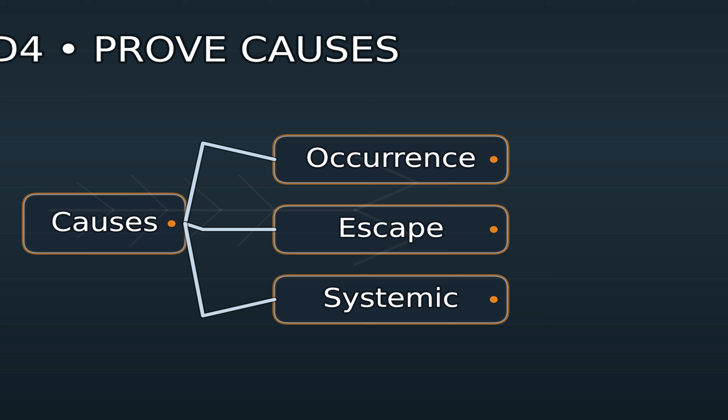D3 establishes customer protection, quarantine suspect parts, verify containment, and set up a firewall. D4 digs into root cause and escape with tools like 5Why, Ishikawa, and cause tests.

D5 selects permanent corrective actions, Poka-Yoke-First, covering all root causes. D6 implements and validates those actions with both quick checks and long-term capability studies.

D7 prevents recurrence by updating standards, rolling changes to similar products, and building the lessons into layered process audits. Finally, D8 closes with evidence, approval, and celebration.

In automotive, this sprint generally follows the 1-5-20 rule: contain within a day, find and agree the root cause within 5 days, and prove the fix within 20 days.

Picture this. You're deep in your day when the phone buzzes. Customer says, "Our line is down, your bracket won't fit."

Your heart sinks. 3 months ago, you chased a similar hole-size issue. You thought it was resolved.

The clock is ticking. Every minute of downtime costs thousands. If you do nothing, you could lose the customer and lots of money.

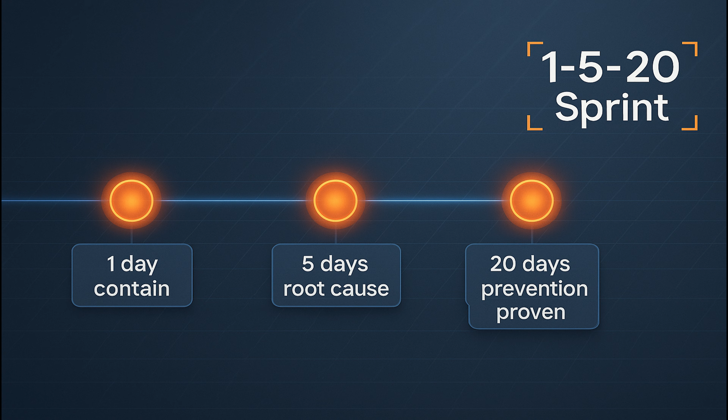In this moment, you need more than a guess. You need a structured response that protects them immediately and prevents it ever happening again.

The fire you feel right now is the fuel for learning. We'll channel it into a methodical sprint.

The goal of D0 is simple: protect the customer and put out the fire. Immediately decide whether to stop shipments or launch 100% sorting or rework.

Open a visible log with times, quantities, and owners. Within hours, declare your clean point, a lot number or timestamp after which every part shipped is verified good.

Important thing is that, don't guess. Include evidence such as inspection records, lot IDs, and photos.

Communicate your containment plan and clean point to the customer through their portal. Use data to reassure them.

Share how many suspect parts were quarantined, how you verified the firewall with run charts, and what's being done upstream. A clear, data-backed clean point calms the customer and buys you time to do real analysis.

D1 is about people and communication. Assemble a cross-functional team: process, quality, maintenance, tooling, logistics, and sometimes supplier quality.

The key point is creating a team with multidisciplinary people. Make sure each member has the skills to analyze the root cause, define and implement corrective actions, and monitor their effectiveness.

Appoint a team leader experienced with the 8D process, and a sponsor or champion who can remove roadblocks. Establish a daily cadence for internal stand-ups, and set a single voice to the customer portal, no mixed messages.

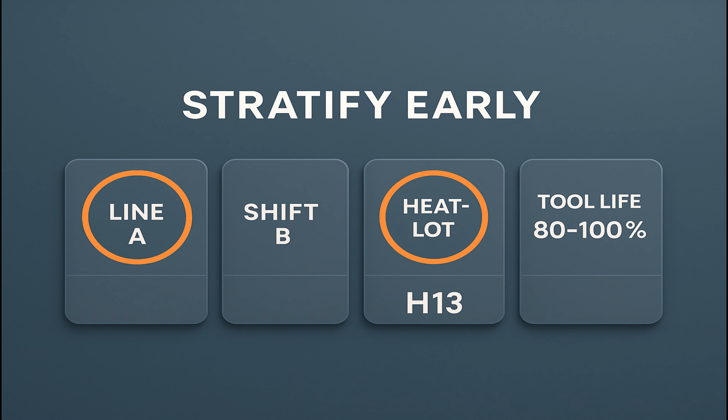Then build an is and is not grid: where and when the defect is found, and, equally important, where it is not. This eliminates random guesswork and highlights the most likely root causes.

Use the 5W1H method to gather all relevant facts: what object has the problem, when it was observed, where it occurs, who or which qualifications are involved, whether there's a trend, and how the deviation manifests.

Collect data and facts: production date, shift, batch, measurement results, and reject rates. Next, verify that the data you're using is reliable.

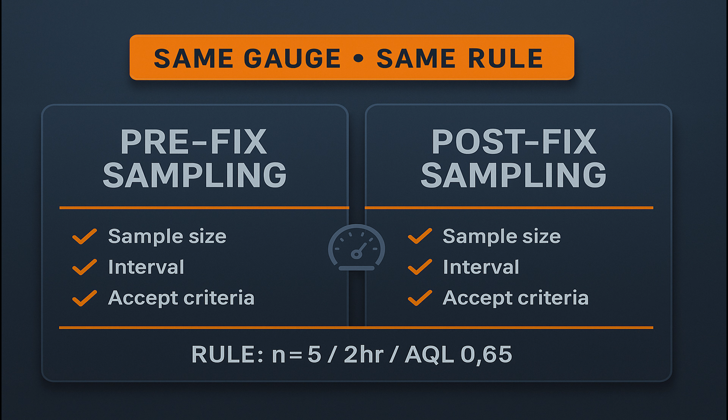Perform a quick measurement system analysis or gauge R&R check. If your measurement variation is over 30%, the system is unacceptable. Between 10 and 30% is conditional, and below 10% is preferred. This quick step prevents you from building an 8D on noisy data.

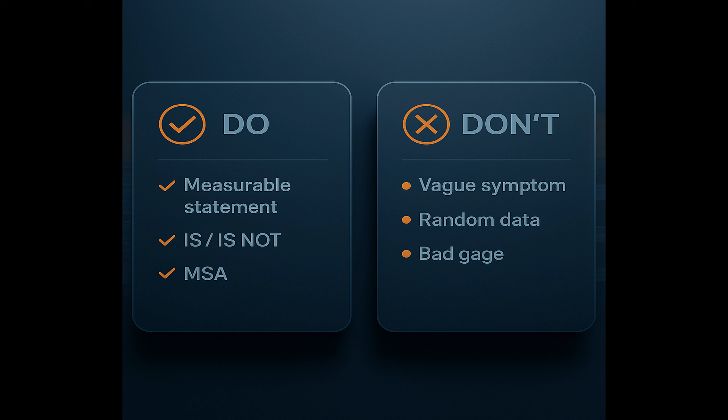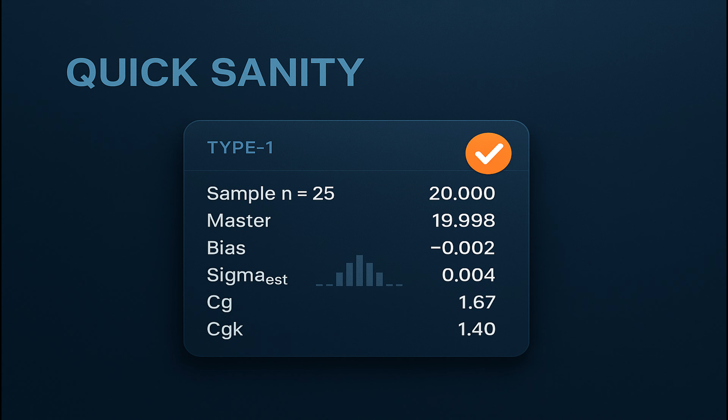Finally, set your targets clearly. Without a defined specification and acceptable performance criteria, teams will debate opinions instead of facts. Tie the problem statement back to a customer requirement or spec limit. That way, success is clearly defined when you select corrective actions.

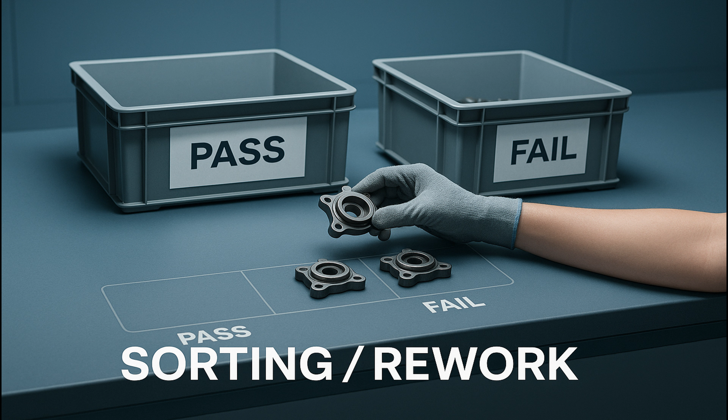D3 builds a firewall while root cause work proceeds. Containment actions protect the customer by isolating the problem from the entire supply chain and avoiding delivery or assembly of suspect parts. Actions can include 100% inspection, sorting checks, or rework.

Define responsibility and start dates for each containment action. Monitor status and assess risks, because containment itself can introduce side effects.

Verify effectiveness with data. Use run charts or additional gauge checks to monitor defect rates and confirm that no further bad parts reach the customer.

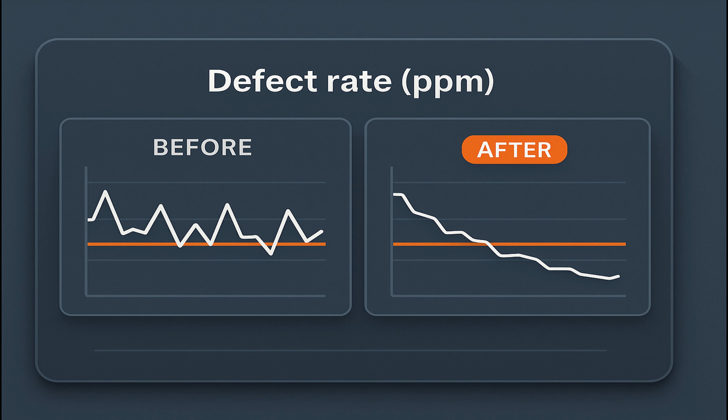Clearly mark dirty and clean areas so employees don't mix suspect and verified material. Remember, the firewall stays up until you've validated the permanent corrective action in D6.

D4 is the heart of the 8D. Root cause analysis must consider 3 levels: the technical root cause, why the defect occurs; the quality assurance or escape cause, why it isn't detected; and the systemic or development root cause, why the system doesn't prevent it.

Neglect any of these and the problem will return. To ensure completeness, use the 3-legged 5 Why. Perform a separate 5 Why on each leg: occurrence, escape, and systemic.

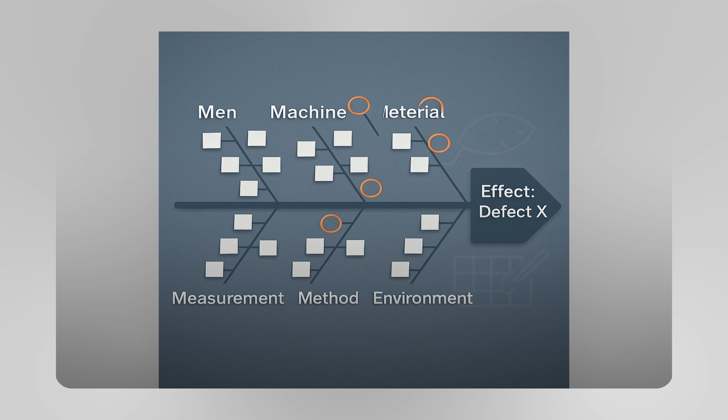Start brainstorming possible causes using Ishikawa or fishbone diagrams when the cause is unknown or complex. Categorize potential causes across men, machine, material, method, measurement, and environment.

Then use 5 why to drill down, remembering that 5 is just a rule of thumb. The root cause might emerge after 3 questions or 7, so do not fixate on 5, dig until you find the cause.

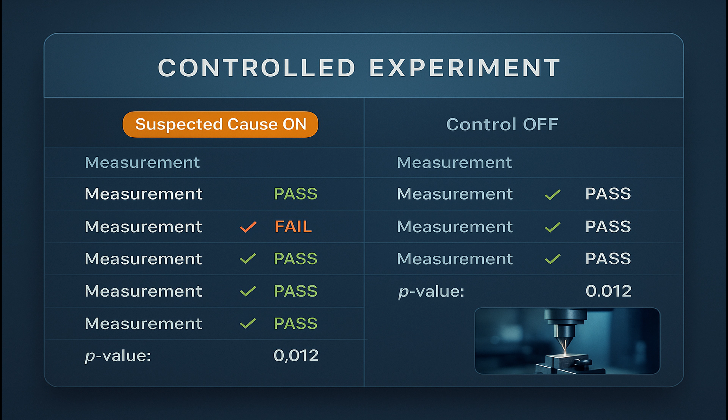Next, apply a cause test for each possible cause you find. Does it fully explain the data, partially explain it, or not explain it at all? Eliminate causes that don't match. For ambiguous ones, do further investigation.

When multiple interacting factors are suspected, use fault tree analysis. Most importantly, verify every proposed root cause. The root cause must be something you can turn on or off at will.

Reproduce the defect by manipulating the suspected cause. Confirm the defect disappears when the cause is removed. Only when both occurrence and escape causes are proven with data do you proceed to D5.

In D5, you choose actions that will permanently remove the causes you've verified. Start by listing potential corrective actions covering all root causes.

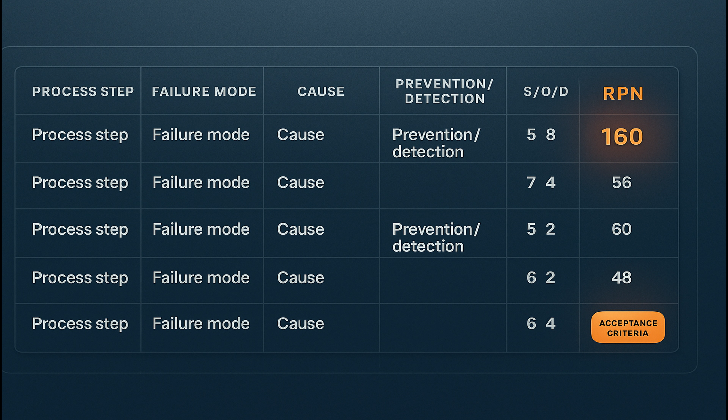Verify and evaluate each one. Perform a risk analysis. Weigh the advantages and disadvantages and be careful of unintended side effects. Establish acceptance criteria and use tools like PFMEA to assess risks.

Prioritize Poka-Yoke, error proofing that makes the defect impossible, over additional inspection. For the occurrence leg, consider sensors, interlocks, or automation to prevent misassembly.

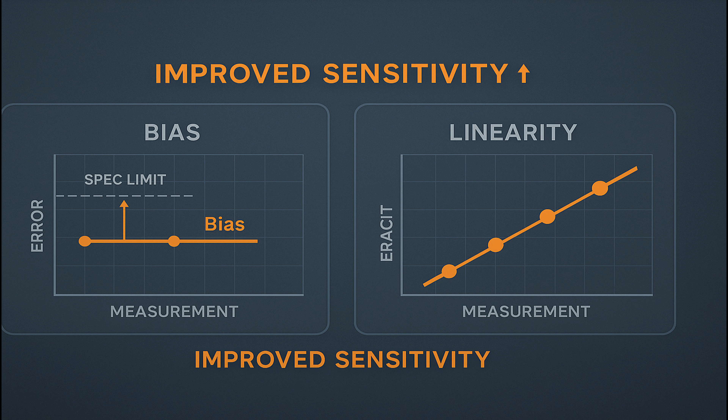For the escape leg, improve detection by upgrading gauge sensitivity or increasing sampling. For the systemic leg, update design guidelines or maintenance plans. Choose the simplest, most cost-effective solution that covers all root causes. Don't forget the human side.

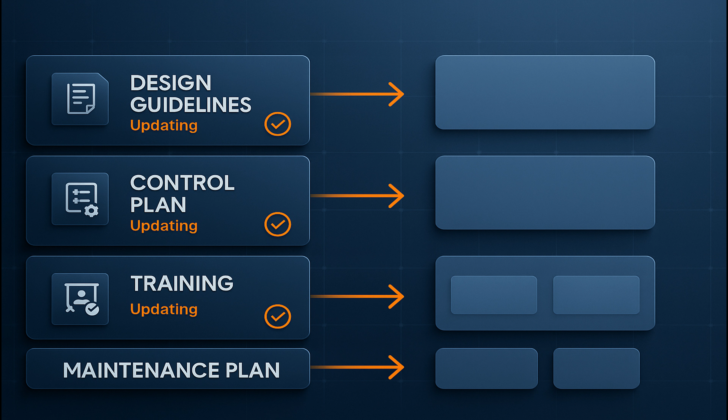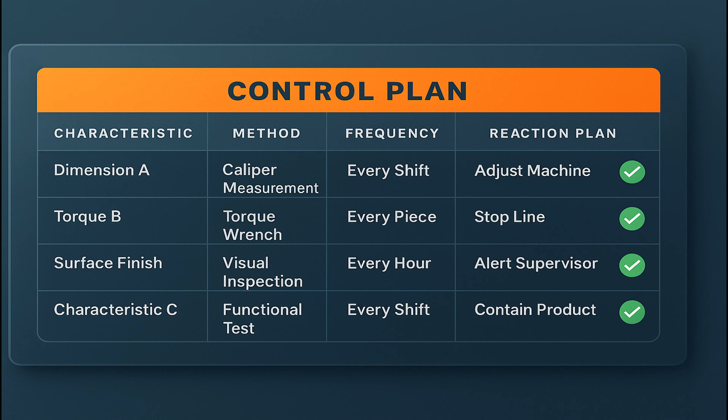Update training materials, work instructions, PFMEA, and control plans, so the new process is documented and auditable. Employees must understand the new standard. Simply posting a notice isn't enough. Refresh training for operators, quality inspectors, and maintenance teams if needed.

And remember the cost of quality. Investing in prevention may have a cost up front, but it reduces warranty expenses and complaint handling later. Corrective actions must address the root cause, the escape cause, and any systemic weaknesses. With the right actions, you'll often see complaint rates drop by 30% or more.

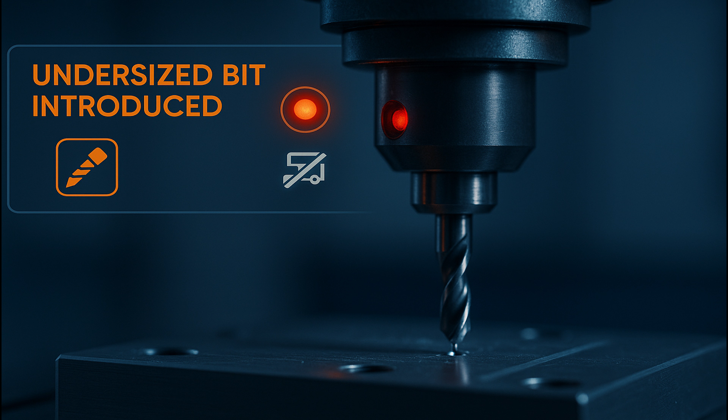D6 answers the question, do the actions work? Begin with a documented implementation plan that assigns responsibilities and dates. After installation, run a quick check, a provocation test, to deliberately challenge the new control and show that it catches or prevents the defect. For example, intentionally introduce an undersized drill bit and confirm the interlock stops production.

This immediate test verifies that the new Poka-Yoke or detection control behaves as intended. Then run a long-term check. Collect data under normal conditions and evaluate process capability. Look at your CP and CPK values, failure rates, and product audits. Only if the process is both stable and capable can you remove containment.

Simulation matters too. Perform rabbit part audits or golden part verifications by running known good and bad parts through the system to ensure it discriminates reliably. Conduct both product audits, dimensional checks, functional tests, and process audits. Confirm procedures are followed, gauges are calibrated, checklists are complete.

If validation exposes gaps, return to D5 and refine your actions. Many repeat failures occur because teams skip rigorous validation. Don't let that happen. D7 ensures the fix spreads and stays.

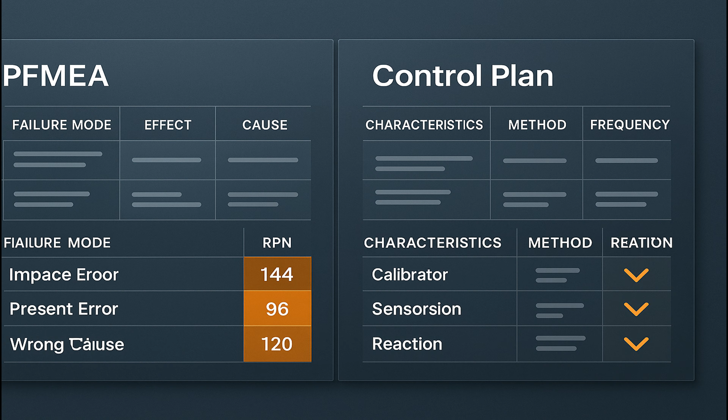Start by updating relevant documents: drawings, FMEA, control plans, maintenance plans, and standard work. Extend the changes to similar products and processes through Yokoten, read across. Ask where else this issue could occur, and implement the same controls proactively.

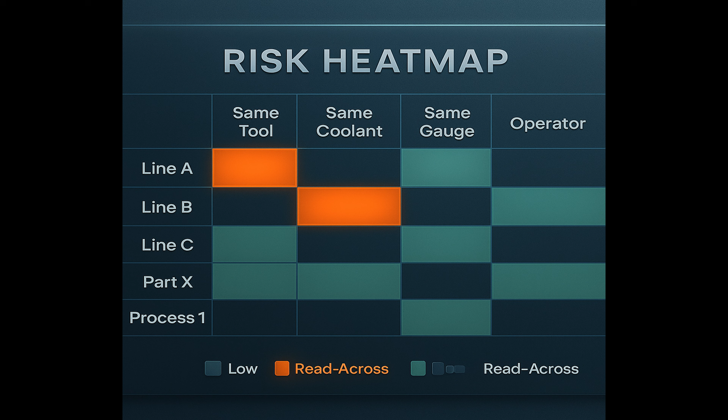Set up or refresh layered process audits, daily line checks, weekly supervisor checks, and monthly management audits to verify that the new controls are present and effective. Add specific questions to your LPA checklist. Is coolant concentration logged? Is tool life counter below limit? Has the pin gauge been verified with a master? What gets checked gets kept.

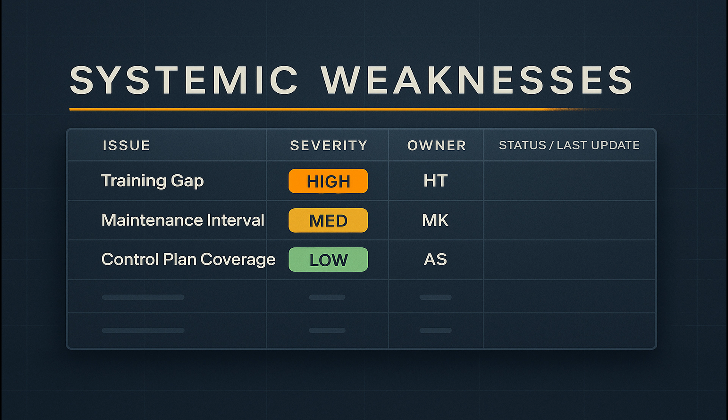Capture lessons learned and share them widely so future products don't repeat the same failure. Document the systemic weaknesses identified, the evidence you used, the fix you implemented, and the performance improvement you achieved. Use a simple template: problem, verified cause, permanent fix, evidence of effectiveness, and where else the fix was applied. Disseminating this knowledge leverages today's defect to make tomorrow's product stronger. Continuous improvement isn't an afterthought, it's how world-class factories evolve.

D8. Closure is more than sending off a report. It involves evidence, acceptance, and recognition. Finalize the 8D report, ensuring all actions have been implemented, validated, and documented. Obtain approvals from both internal management and the customer.

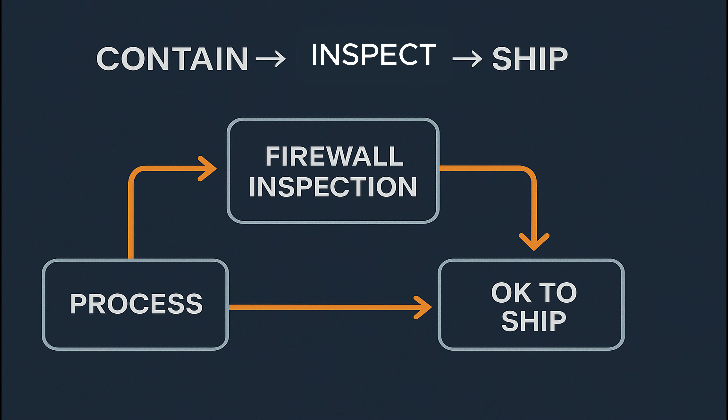Many OEMs require a plant or quality manager to sign off. Archive the supporting data and update the portal status to closed or accepted. Then recognize the team, publicly acknowledge the cross-functional effort, share customer feedback, and celebrate the success. Recognition reinforces the behaviors you want to see again.

Different customers use different portals, but patterns repeat. Ford's portals emphasize a clear evidence trail and feeding lessons learned into future projects. Ford used Covisint and FOSN portals to follow claims. GM's portal requires a rapid cadence of updates and emphasizes data and next steps. GM used Supply Power/PRR portal.

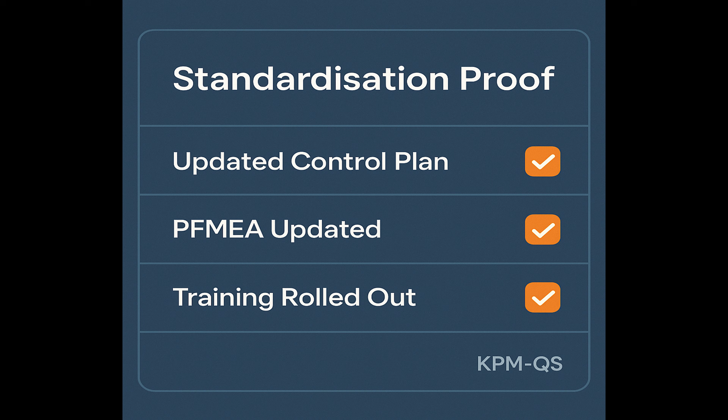Stellantis demands logic chains and proof of standardization and uses the SQP portal. Volkswagen and Audi use KPM-QS, and they look for evidence of standardization. Mercedes wants detailed governance and uses the QEC tool. BMW and Toyota have their own forms. BMW uses the QMT portal and Toyota uses the SQAM portal. Tesla uses the SCAR portal as well.

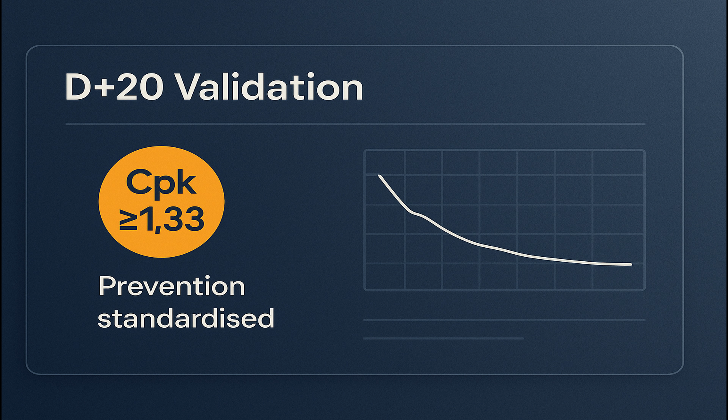Regardless of portal, suppliers should follow the 1-5-20 rule. Within 1 day, define and communicate containment actions. Within 5 days, submit root cause analysis and corrective actions. Within 20 days, prove the fix and communicate actions to prevent recurrence.

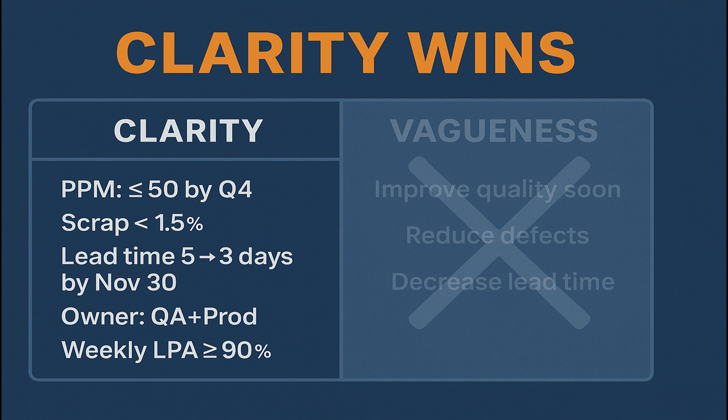All portals want concise notes, time-stamped updates, and attachments like gauge studies, cause tests, corrective action verification data, and capability charts. They reward clarity and penalize vagueness. Understanding each customer's focus lets you tailor your reports and build confidence.

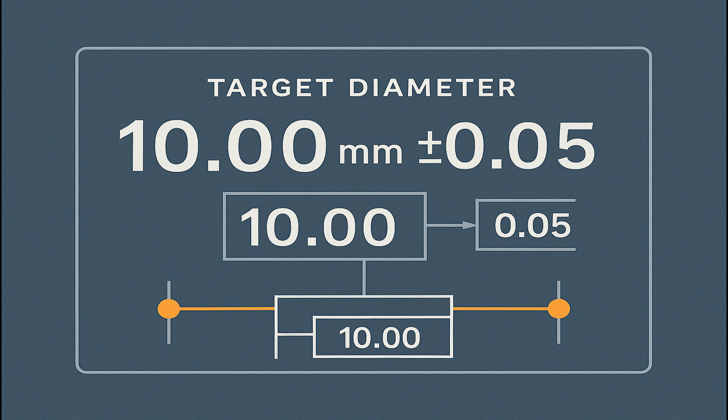Let's ground all of this in a realistic case. Suppose the target hole diameter is 10.00 millimeters plus or minus 0.05. The customer reports 8% of parts arriving between 9.86 and 9.89 millimeters.

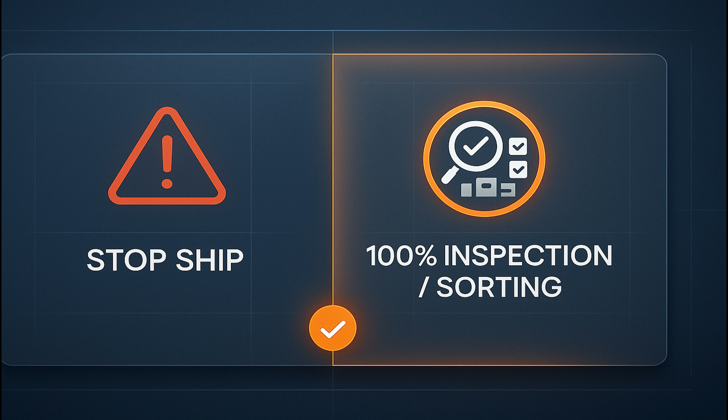Their line stops. You trigger D0: stop shipping, segregate suspect parts, implement 100% inspection, and declare a clean point at 14:25 on September 5th, lot B271. You record quantities, inspection methods, and attach the log.

In D1, you assemble your cross-functional team with process, quality, maintenance, tooling, logistics, and a sponsor. You set a daily update time with the customer.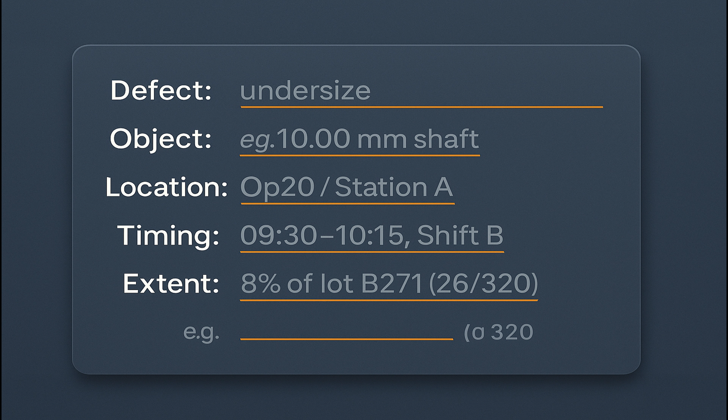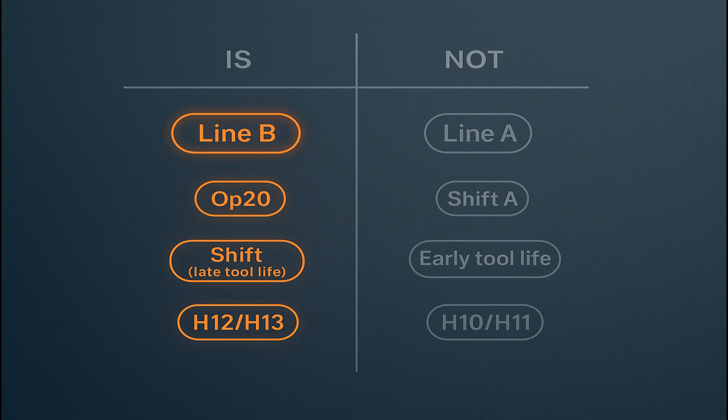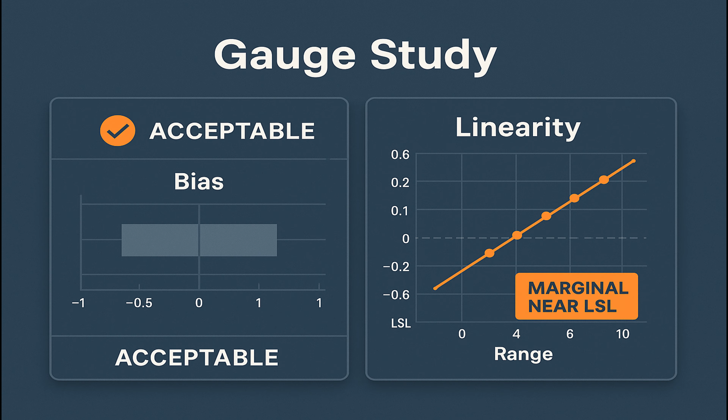During D2, you write a measurable statement and build your Is/Is Not grid. The problem occurs on line B, operation 20, heat lots H12 and H13, mostly on shift B near the end of tool life. It does not occur on line A, shift A, early tool life, or heat lots H10 and H11. You verify the gauge: bias acceptable, linearity marginal at the lower spec. You collect data on coolant concentration, tool cycles, and hardness, and set a target CPK of 1.33 or higher.

In D3, you install a temporary pin gauge station with tightened sampling at the end of the operation and mark separate dirty and clean zones. You run a false negative challenge and record zero escapes during containment.

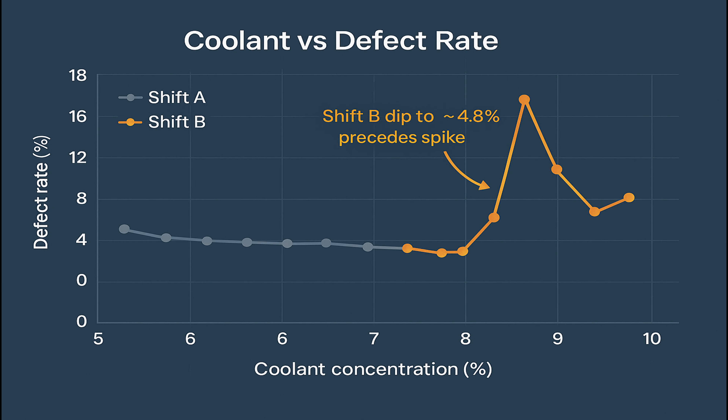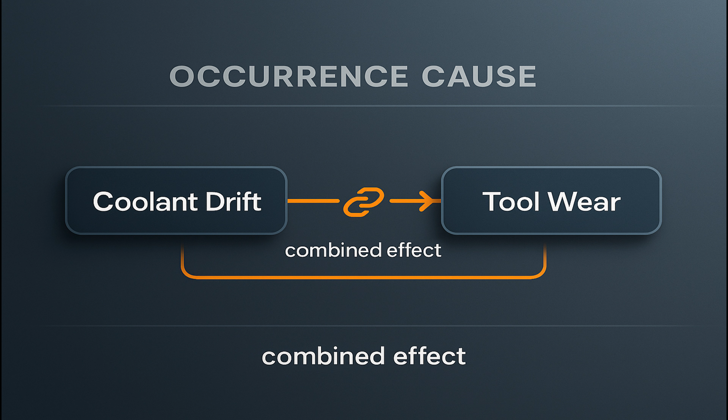For D4, you generate hypotheses: coolant drift, tool wear, fixture mislocation, gauge bias, material hardness. You run titration tests and plot coolant concentration versus defect rate. Shift B shows a drop to 4.8% just before the defect appears.

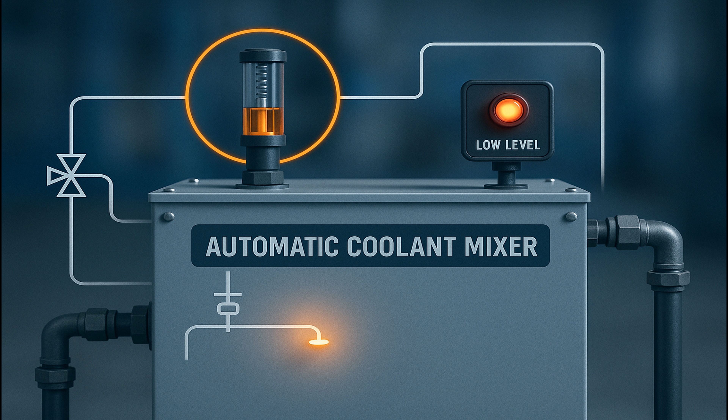You analyze tool life and see the diameter trending down near end of life. Fixture repeatability is clean, hardness normal. Gauge linearity is marginal, but not the root cause.

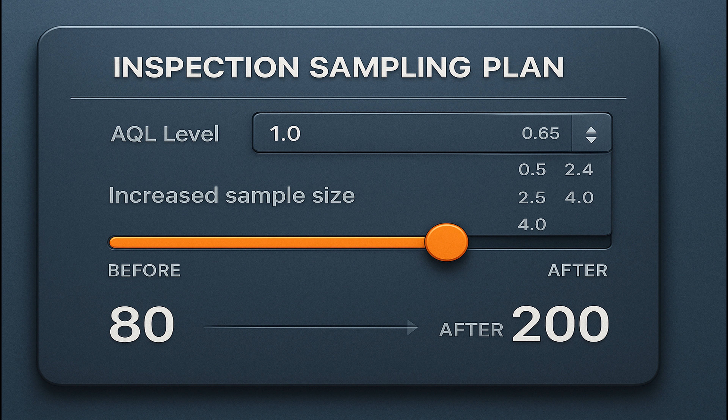You intentionally run the tool past its life and lower coolant concentration. The hole goes undersized. Raising coolant and resetting tool size eliminates it. You conclude the occurrence causes are combined coolant drift and tool wear. The escape cause is an insensitive gauge and sampling gap. The systemic cause is missing control in the design and maintenance system.

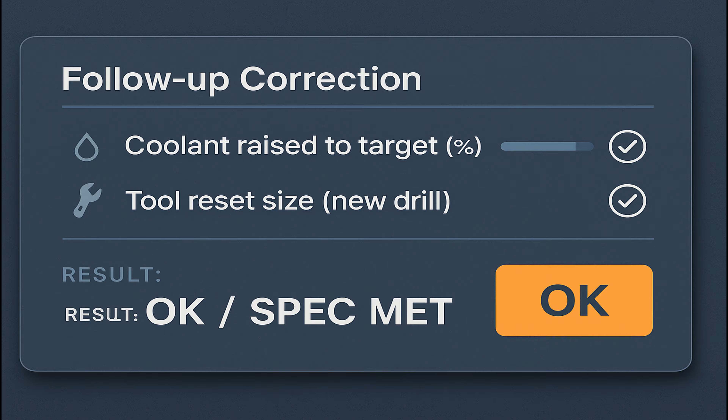In D5, you select permanent actions: install an automatic coolant mixer with low-level interlock and daily titration checklist, add a tool life counter with andon and interlock, replace the gauge with a more sensitive digital indicator and revise sampling frequency, and update the PFMEA and control plan.

You verify cost and side effects and train operators and maintenance on the new systems.

In D6, you validate. A provocation test shows the interlock stops the machine when coolant is low or tool life is exceeded. SPC charts show stability after the fixes. Capability improves to CPK greater than or equal to 1.33. Product audits confirm holes stay within tolerance. You remove containment with customer approval.

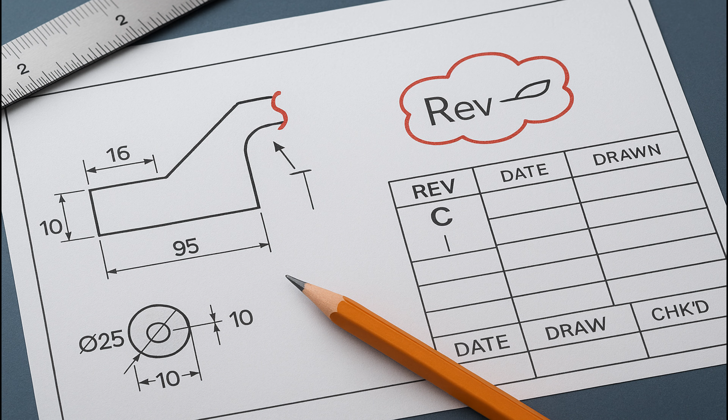In D7, you update drawings, PFMEA, control plan, and maintenance plans. Implement the same controls on line A and the sister plant. Add LPA questions, and capture lessons learned.

In D8, the customer accepts the report. You archive the data, issue a one-page lesson card, and thank the team.

Implementing these controls not only solved the problem but improved process capability across similar parts, reducing PPM by more than 30% and slashing complaint calls.

What happens when you execute a world-class 8D? You transform a crisis into an opportunity. Investing in prevention, measurement, and error-proofing reduces the cost of poor quality dramatically.

In our case, the new controls cut escapes by over 30%, halved complaint calls, and paid for themselves through warranty savings. Team members learned new problem-solving skills, the company's reputation improved, and future products will benefit from the lessons learned.

That's the real payoff. You don't just fix one defect, you build organizational muscle that makes tomorrow's problems easier to solve.

Today we talked about how to use the 8D problem-solving approach to eliminate recurring failures and improve quality. We reviewed the core steps, key checklists, and the tools you'll need to drive continuous improvement.

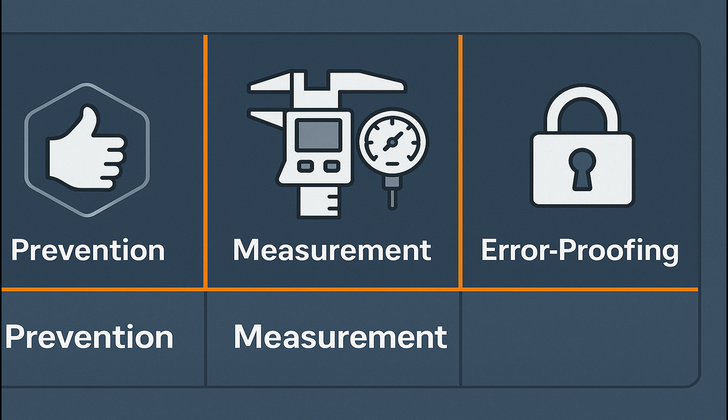In our next training video, we'll take a closer look at each stage from D0 through D4. We'll show you step-by-step how to respond to emergencies, assemble your team, define the problem, and conduct root cause and escape analyses.